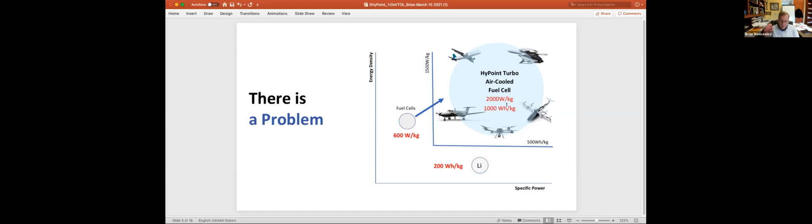So what we've done is solve some of these issues by building the next generation fuel cell, which is based on our architecture of this turbo air-cooled system. We have recently demonstrated, and I'll elaborate on this today, that we're now able to reach 2,000 watts, or 2 kilowatts per kilogram, and 1,000 watt hours per kilogram in our systems. This is really what aircraft designers are looking for.

Let me tell you a little bit about our product development recently. In December, just a few months ago, we built a fully operational prototype, which was a very important step in our development because there were a lot of technological and fundamental validations concentrated into the single prototype. This was based on high temperature PEM membranes, so it was very important for us.

We finished our testing program, and the data we got really confirmed that we could achieve greater than 2 kilowatts per kilogram at a system level. Based on our agreement with customers, and after this successful prototype development, we're ready to build a full-scale system which should be delivered to a customer in 2022 for a flight test.

Scaling from the short stack through a 15 kilowatt intermediate module to the eventual full system is really not, in our mind, a fundamental modification. It's really just the same system, but in a larger form factor. What it does require is a more accurate execution of our engineering work.

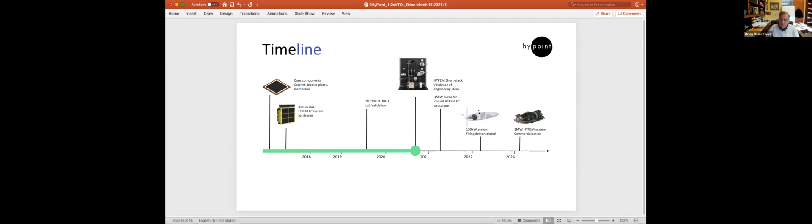If there's a few people who don't know how a fuel cell works, let me throw in the most basic diagram I can imagine. Hydrogen is a really simple molecule, even if you're not a chemist, composed of 2 protons and 2 electrons. So what we do is rip this apart using a catalyst, move the electrons through an outer circuit, and the protons through some kind of a membrane. Then we recombine the electrons and protons.

We borrow some oxygen from air and make water. Of course, what we really want to do is move the electrons through this outer circuit so we can do some useful work, light a light bulb, maybe run a laptop, a car, or in our case, generate enough power to support air transportation. This requires an awful lot from this membrane, but the technologies are here today, we believe, to do that. So that's the simplest diagram I can imagine for how a fuel cell works.

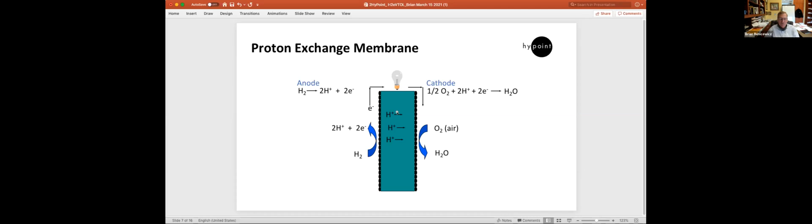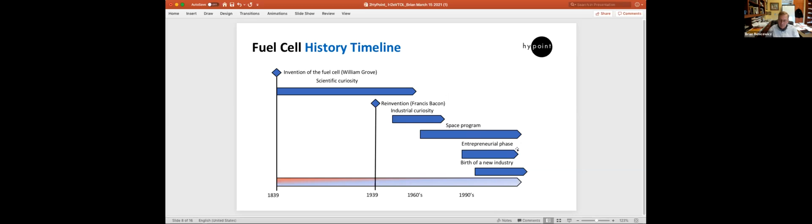Fuel cells are not new. Originally invented by William Grove in 1839, frankly not much happened for about 100 years. Francis Bacon is given credit for reinventing the fuel cell, if you will, or rediscovering it. But even then, it was kind of an industrial curiosity for a while. I think it got a lot of notoriety once we hit the 1960s because it was used in the space program. Then from about roughly the 1990s on, we see what you could call the entrepreneurial phase and really the birth of a new industry of bringing fuel cells to a variety of markets, which we continue to do today.

There's many different types of fuel cells. I'm just going to briefly touch on each of the types and give you a little bit of the pros and cons, particularly from the viewpoint of use in aviation. I'll end up with the high temp PEM because that's the one we think is going to really solve the problems.

Again, I mentioned alkaline fuel cells have been around for a while. They were used in Apollo space missions. The picture here is in fact one of those that delivered between 600 and 1400 watts for these space missions. It operates just under 100 degrees C most of the time.

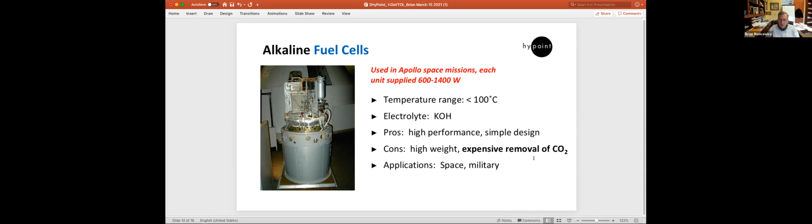The electrolyte used to move the protons across that membrane is potassium hydroxide. This is very corrosive material. The pros are reasonably high performance and fairly simple design. The cons are pretty high weight for this power, and unfortunately this electrolyte is poisoned by CO2. So for this to operate, you have to have subsystems to make sure carbon dioxide from the atmosphere doesn't get into the cell. It's pretty much limited to space and military type applications.

Solid oxide fuel cells have gotten some attention recently. Its temperature of operation is pretty high, 800 to 1,000 degrees C roughly. It uses a solid thin oxide film to move the protons. The pros here are pretty high efficiency and flexibility of fuel types. You can use hydrogen, or take more complex fuels, some hydrocarbons, and reform them to pull that hydrogen out to make them operate. But the cons are this high temperature enhances corrosion and breakdown of cell components. You have much longer startup and shutdown cycles, which can also create thermal fatigue and cracking of the various parts. Used mostly for electric utility.

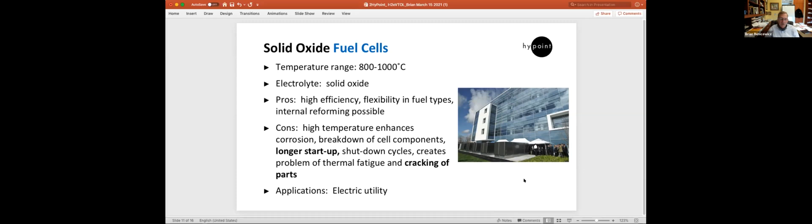Here's a famous picture that shows several of these solid oxide fuel cell installations, and they were having a little ceremony for the kickoff of those, but very good for electrical utility applications.

Another one that's been around for quite some time is the molten carbonate fuel cell. These are made at the megawatt power levels, and this shows an installation with several of these. It uses a carbonate kind of salt to move the protons. Again, these are high efficiency and flexible in fuel types. You can do internal reforming easily, and it's more tolerant to carbon monoxide and carbon dioxide. The cons are, of course, the same as the previous one for high temperature operations - it enhances corrosion and breakdown of cell components, with much longer startup and shutdown cycles to go from room temperature up to operating temperature, creating thermal fatigue and cracking of parts.

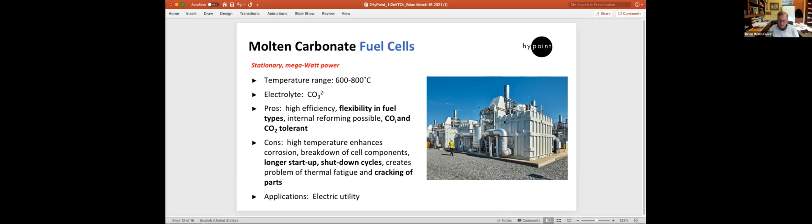And again, as you see in the picture here, it's very good for electric utility applications.

But it's very sensitive to fuel impurities. It's not so much the polymer membrane, but the catalyst at these temperatures that's poisoned by small amounts of carbon monoxide, so one has to be careful of that. And it's very sensitive to the amount of water that's in the membrane. There's been a lot of work done over the last two decades trying to handle and manage these water issues, which is difficult because people like to push it closer to the 100-degree operating temperature, approaching the boiling point of water. You don't want to evaporate all that off, so it's a bit of a trickier water management issue.

But it has found applications in electric utility, portable power, and what you might call terrestrial transportation, AKA cars and trucks. So that's the current state of the art.

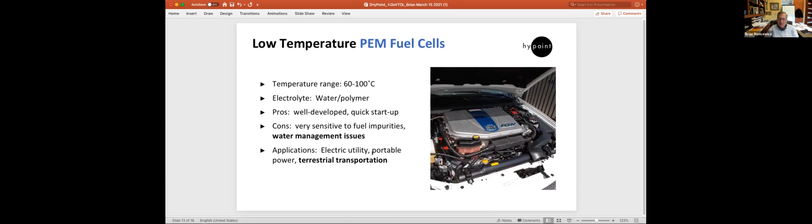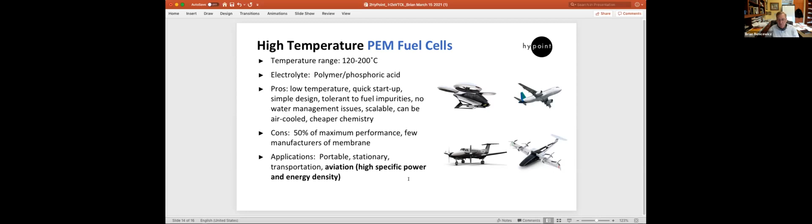The cons are, well, we're probably only about 50% of what we can get out of this so far, which is maybe good news because we have lots of room to improve. And there's maybe just a handful of manufacturers of the key membrane. We've already seen applications in portable, stationary, transportation, terrestrial, and we're going to show you that it's also very good for, and excellent actually, for aviation because you can achieve both high specific power and energy density.

I think there was one missing from this somehow, or maybe I skipped it. But anyway, let me stop there. I really appreciate your attention and the invitation to tell you a little bit about what we've done, and I'll be happy to answer questions and enter into any discussions people might want to enter into. Thank you.

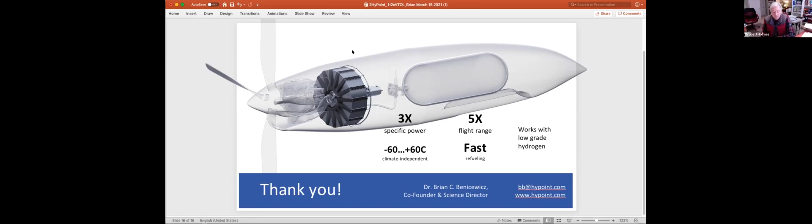So a good primer on hydrogen safety that we would have access to, Danielle, would be, I see Charlie Myers in the participant list. Charlie provided the FAA Technical Center about a month ago a hydrogen safety overview, and it's widely attended by many people in the FAA, and I think it would be a valuable addition to the agenda for one of our H2 Council meetings. It's a very impressive story about both the history and the current standards for hydrogen safety that create a very compelling positive view with appropriate cautions.

Thank you very much. But I would like to add that we also consider a number of options for hydrogen, including liquid hydrogen, liquefied hydrogen, and some fuels that can be used on board to produce hydrogen on board. So for example, methanol or ammonia could be used in liquid form in order to produce hydrogen on board. So there are a number of options, and our fuel cell, HTPEM fuel cell, can operate with these types of fuels as well, besides gaseous hydrogen. So we believe that for different applications, different options could be used.

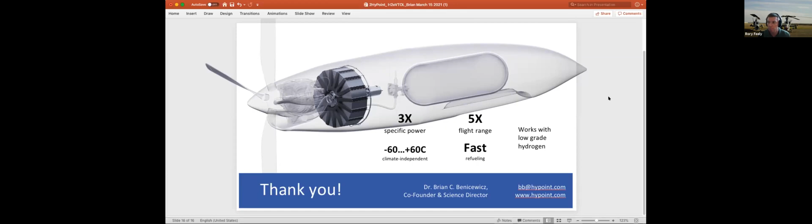Brian, Thomas, thank you very much. Thomas Jones here from Plug Power. I enjoyed your presentation, thanks very much. I'm very interested to see the advancements in high temperature membranes, because it's certainly been the holy grail of fuel cells ever since the automotive OEMs were complaining about the sizes of the radiators in the mid-90s, trying to get them into the vehicles.

I have a question about overall system level efficiency. You have a couple things against you. One is that you're compressing both your reactant air and your cooling air, and as you go to altitude, that's going to be a relatively big hit from a compression perspective, from a pressure ratio point of view. The other thing you mentioned is lower cell efficiency, and with that comes the need to carry more hydrogen. So you may have a high specific power of the stack, but when you look at it at an overall system level, you may need to carry twice the amount of hydrogen to have the same range. Could you comment on those two things?

I'll start with the hydrogen one, the last one you just mentioned. I don't think we'll waste very much. You can imagine operating under a dead-end anode architecture, so you're actually not wasting any of the hydrogen. It's not like you're going to pass it through and operate under efficiencies where you're going to throw away 20% of it or something. No, but you had indicated that your cell efficiency is 50% of, say, the low temperature membrane.

Well, what I was thinking is not so much the cell efficiency as where I think we can go. We're at 2 kilowatts per kilogram now, and if our goal is 4, we're halfway there. It's not quite the same efficiency, but I'm thinking of what we need for air transportation, and I think we can massage out even more than what we've got now. If you hit 4 kilowatts, which would be the 50% of a rough calculation, then I think we've got a system that'll satisfy a broad range of aviation applications. That's what the 50% came from.

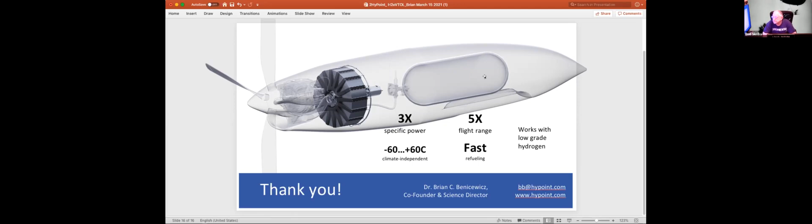I'm just kind of catching up on the chat.

So at HyPoint, Brian, you guys are not using batteries at all, or are you combining this system with batteries? I'm a little confused.

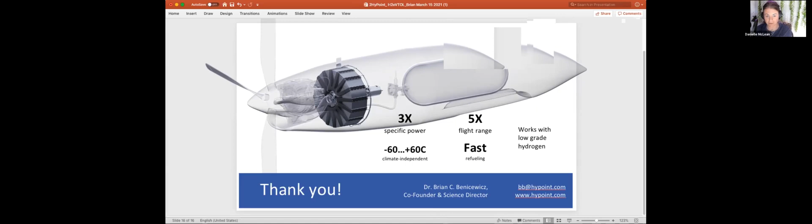No, we would not typically put batteries in unless somebody else wants it. You can get enough power for the hover operations. If somebody wants a battery in there, it depends upon the design. We can do that, or use capacitors, ultracapacitors, but typically we're going to try to develop this to be a fuel cell only system.

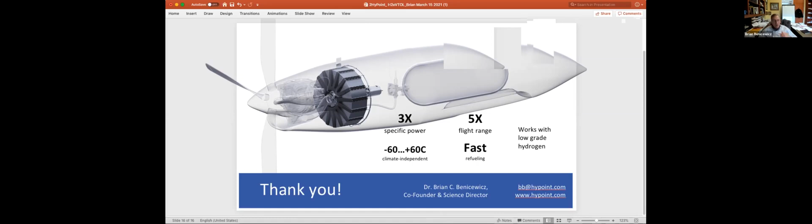And what's the specific power that you're shooting for? Well, let's see if I can back up. Right now we've hit 2 kilowatts per kilogram in our prototype short stack that we just announced results of in December. That will translate up to larger systems, which is what we're going to do over the next year or two. So that puts us into a market for a lot of things already. Is that including balance of plant? Yes, this is the system calculation.

One of the things that we're doing is using the turbocharger to provide pressurized air as well as the function of the cooling system. So what we've been able to do is get rid of a lot of weight because we don't need a liquid cooling system as part of our balance of plant. And that saves a tremendous amount of weight.

Colleagues, sorry, may I add a comment to the previous question regarding liquid hydrogen, if it's important. I missed this question because I was answering in the chat.

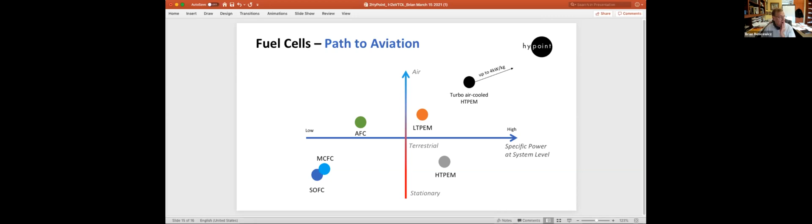And then after that, in May, we'll have intelligent energy. And then we're looking at for June, hopefully hydrogen forward, pending that contact coming through. And then July, I can't remember what BC stood for, but Mike Diamond, you probably remember better than I do. Yeah, that's British Columbia, and the province is gearing up for the export of hydrogen, initially targeting the California marketplace. Okay, perfect.